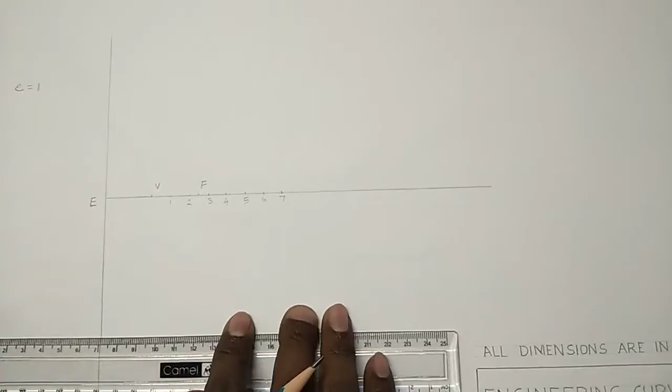So parabola is an open curve. You can mark an infinite number of points and you can draw an infinite size of parabola. But for this A3 size paper and our academic purpose, I am restricting this with some 7 or 6 points. Okay. And then, as per this procedure, you need to draw vertical lines in each and every arbitrary point. For that, make your drafter comfortable with that. All vertical lines should be parallel to your directrix and perpendicular to your axis.

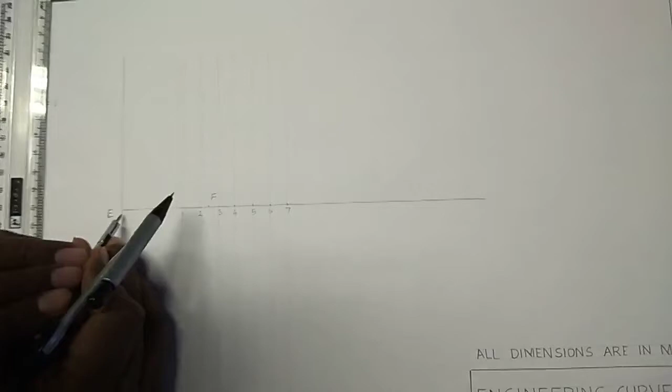Yes. Now I completed drawing the vertical lines, and then you need to cut the arcs in each and every vertical line in upside and downside by using your compass. Here what measurement you need to take is, first you need to take the measurement E1. See, I took this, and then by making the focus point F as center, and in the vertical line drawn from the arbitrary point 1, in upside and downside I am making 2 arcs.

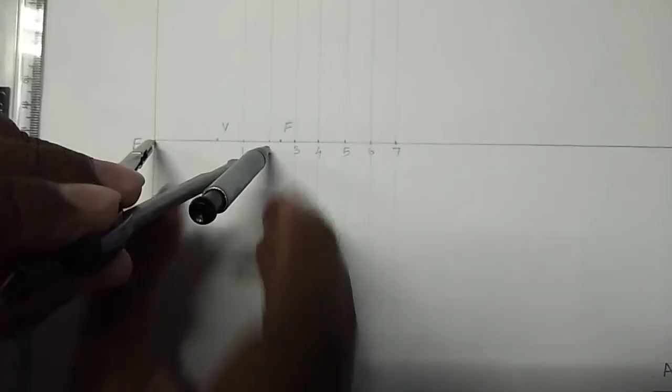Okay. In the same way, load your compass with the radius E2, and making again the focus point as pivot, cut arcs in the upside and downside of your vertical line drawn from the point 2. And then load E3. Again make F as center, cut arcs in upside and downside.

Sorry for my shadow.

And load E4. Again make F as center, cut arc in upside and in downside. The same way I am doing with number 5. And in the line drawn from 5, cut arc in both upside and downside. Similarly for 6, take distance E to 6 and again F as center, that is your focus point as center, cut arcs in upside and downside.

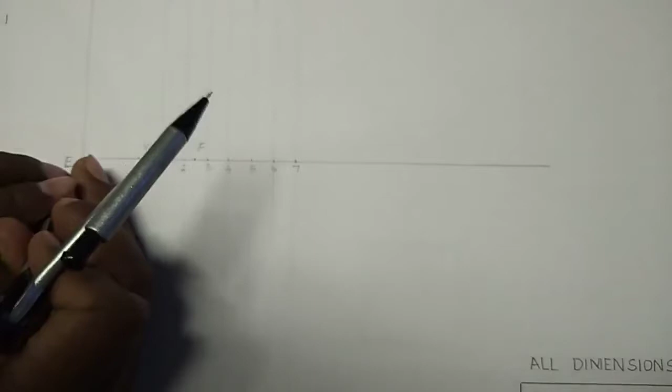And finally I am loading my compass with the radius E7, make again F as a center, cut arcs in upside and downside in the vertical line drawn from the arbitrary point 7. Now the arc cutting process is over. Okay, you can see we produced a number of points. For our convenience, you can make a simple identification on the intersection points of arcs on the vertical lines with mild points. Don't make heavy points there which will spoil the future curve appearance. Make mild points.

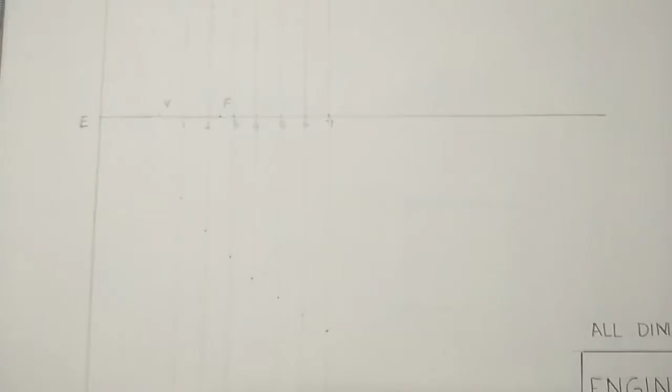Here in this video lecture, for your convenience, I am making some bold points. But in your paper, just for identification, you can make some simple points only. You can name them for your identification. Otherwise, it's not a problem. If you are able to identify the purpose of each and every point, you need not name them.

Okay. And then here, what I am going to do is produce this parabolic curve by joining these cut points starting from V, upside and downside. For that, first you need to make a rough line on the points. For this purpose, I can use my French curves.

Maybe some of you don't know about this. This is the French curve template which is provided in the set square set. This French curve set may be used to help us draw a smoother curve in this way. See, I will teach you how to use this French curve for our purpose.

Even without this French curve, you can do the joining process. But if you use this French curve, the curve will be smoother. See here. Effective usage of the French curve will come only after some experience. So try your best.

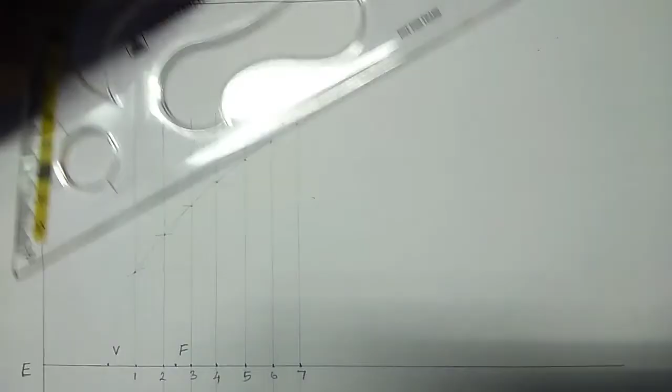I am making a rough line with my 2H pencil only. I don't know whether it is visible to you in this video, but just follow along. And then I am connecting some points with the help of this French curve. Yes, I completed the top half with this French curve and a 2H pencil.

In the same way, if you are supposed to join the bottom half, you need to just tilt your French curve in this way, because the bottom curve is the mirror image of the top curve, since your parabola is an axisymmetric curve.

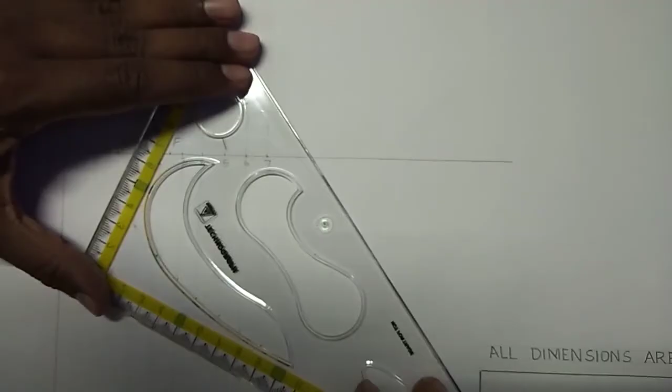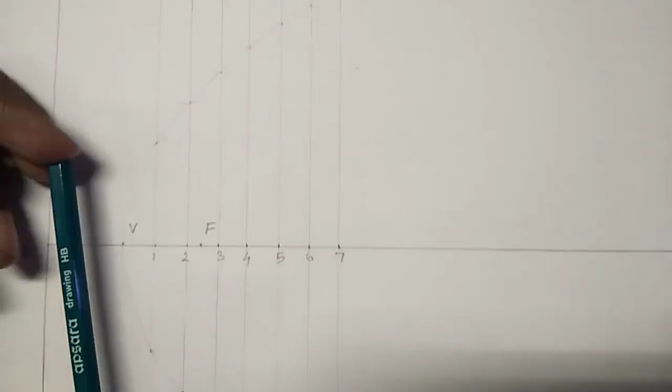Yes. Now I connected the cut points with the help of the French curve and a 2H pencil. After that, in order to highlight this, you need to use your HB pencil for highlighting the given parabolic curve. Just trace the path of the previous mild curve and complete this.

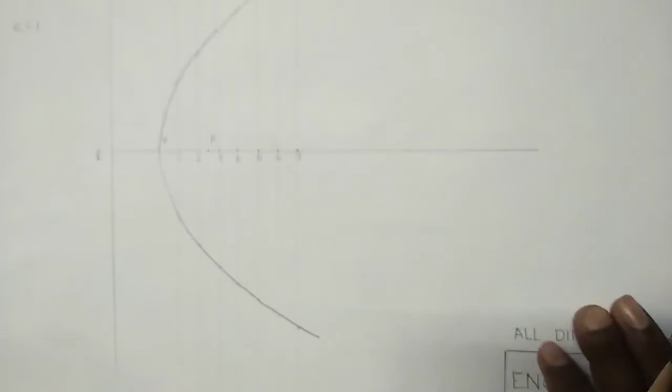That's it. In this way, we can complete drawing the parabolic curve. Thereafter, you need to draw the tangent and normal for the same curve. And when you are going to connect the rough sketch with the HB pencil, try to avoid mismatching the track of the 2H pencil and the HB pencil.

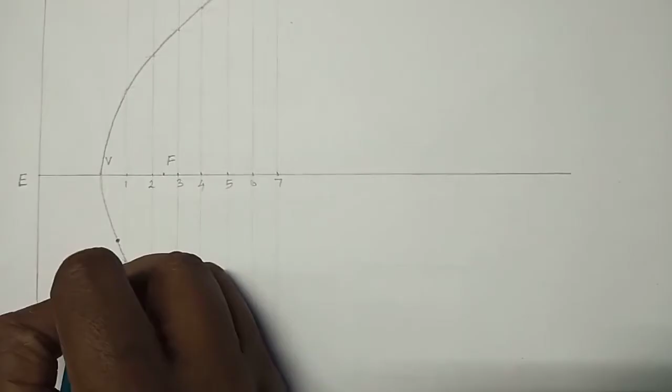Okay, and now I am making a point randomly anywhere on this parabolic curve, say here. The point may be named with the alphabet A. As per the procedure, first you need to connect this point and the focus point. Now I am changing to my 2H pencil. Connect this point and your focus point. A line is there. Now set your drafter.

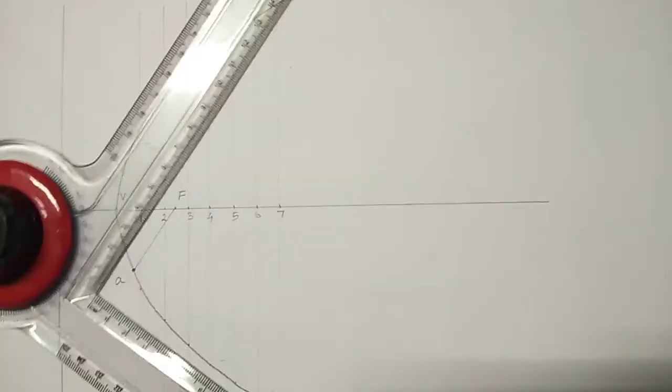You need to produce a line from the focus towards the directrix line, maintaining it perpendicular to AF. I am using a drafter, so I need not worry about that. Definitely the proposed line will be perpendicular to my AF line.

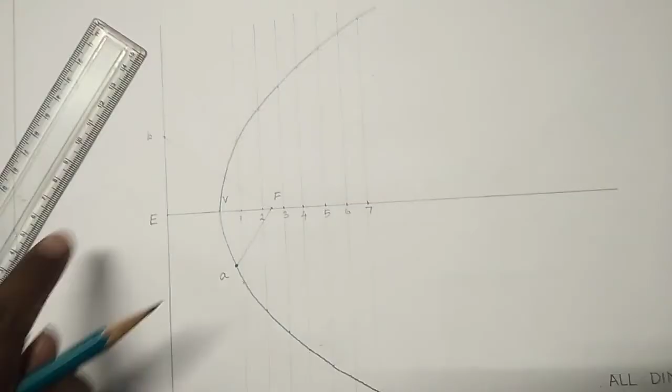Okay, so here you will get one more intersection. This point may be named with the alphabet B. Now you need to connect B and A by a straight line. This will definitely become a tangent to this parabolic curve. Along with that, you can tighten your drafter also.

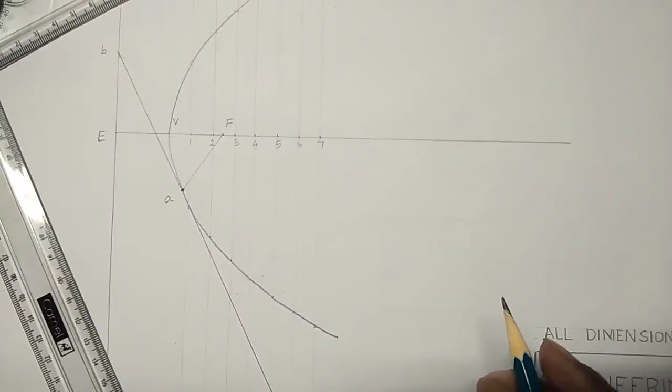The tangent line can be drawn using the HB pencil. See here, this is nothing but the tangent line. It's not crossing the curve, it's just touching the curve, precisely at the point A. This is your tangent line.

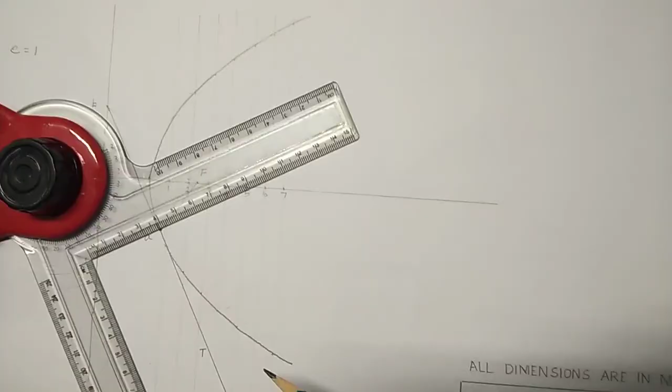And my drafter's one scale is now set with the tangent line. So the other scale is obviously perpendicular to that first scale. So I can draw the normal line, which is purely perpendicular to the tangent line. And the normal line should be drawn at the point where we drew the tangent line, using the HB pencil. So this is nothing but my normal line.

Yes students, now we have seen how to draw the parabola using the proper tools on A3 size paper. The same way, you can try it with your own tools on your paper and draw the required parabola. Good luck.